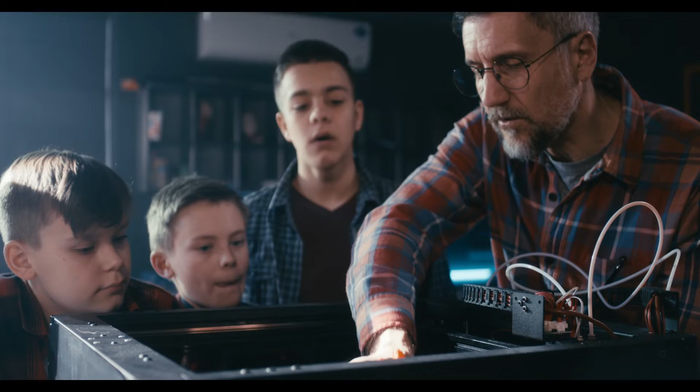Today we're having a list of the world's best 5 3D printers for your office, lab, studio, or workshop.

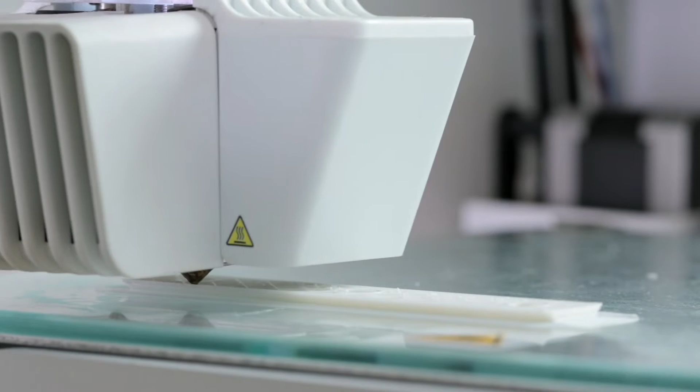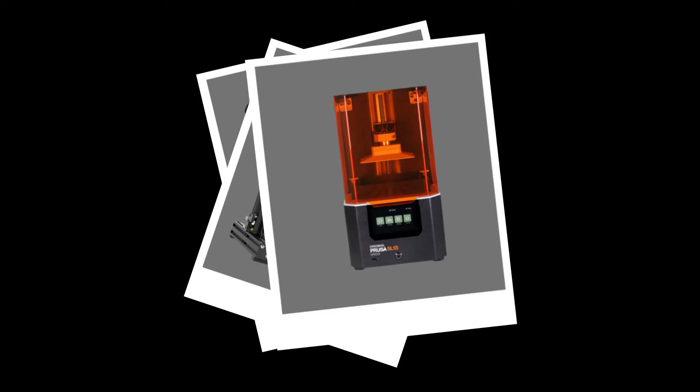3D printing is a valuable thing to have access to, and for your small businesses this process is an essential part of project needs on a daily basis. If you're thinking of buying a 3D printer for your small business, we've selected 5 top 3D printers that are easy to use yet produce high-quality, reliable results. Some of the items below are given with links in the description of this video.

Let's start the top 5th 3D printer.

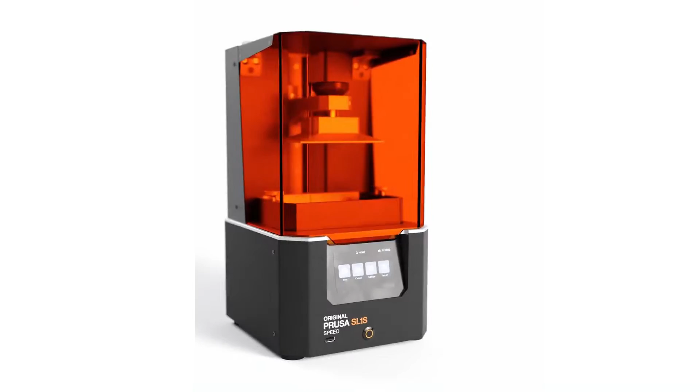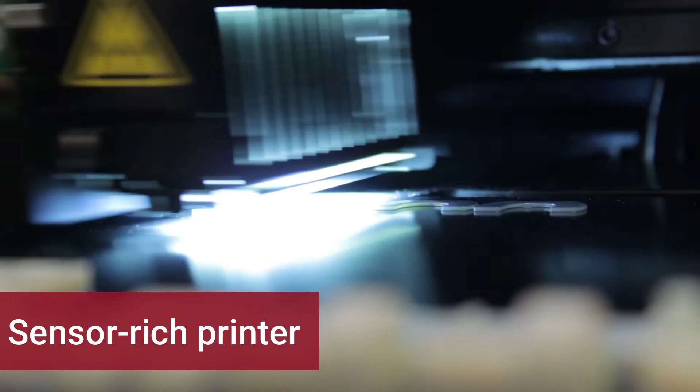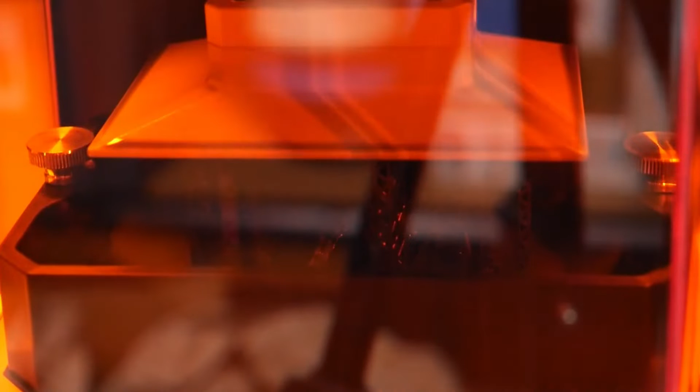5. Prusa SL1S. The Prusa SL1S is an MSLA resin 3D printer that offers speed, precision, and a high level of automation. The sensor-rich SL1S offers a guided unboxing, setup, and calibration through the color touchscreen LCD, and the included manual contains detailed documentation, which provides troubleshooting steps for nearly every common problem you may run into. Prusa has developed the hardware, software, and even the resin used by this machine to work together.

And this effort has culminated in one of the easiest to use resin MSLA 3D printers on the market. The SL1S uses a tilting resin vat that enables blazing fast print speeds without compromising print quality or risking part failures. The vat peels gently from each cured layer, allowing for wide cross-sections or thick, solid models to print without excess suction causing the part to stick to the FEP film.

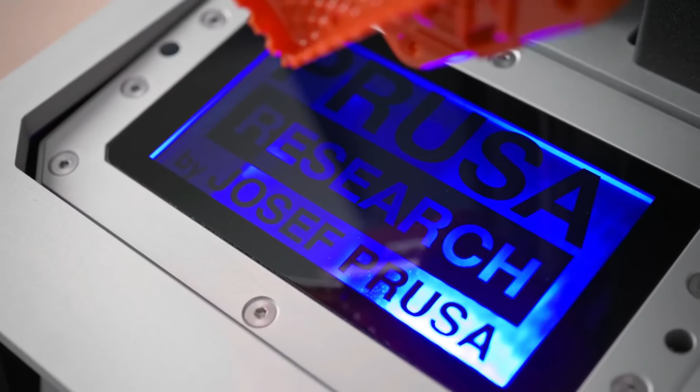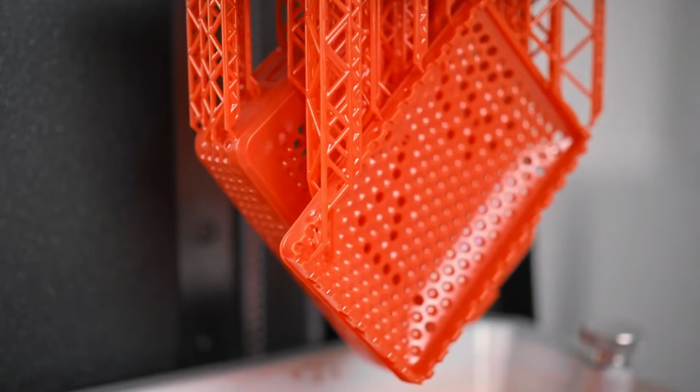The 2560 x 1620 masking LCD resolution and 5.96-inch LCD size give an XY resolution of 49 microns, which is standard for most 2K resin MSLA 3D printers. The rigid aluminum gantry and solid metal build platform move via a ball screw linear actuator, offering precise layers down to 0.025 mm, 25 microns.

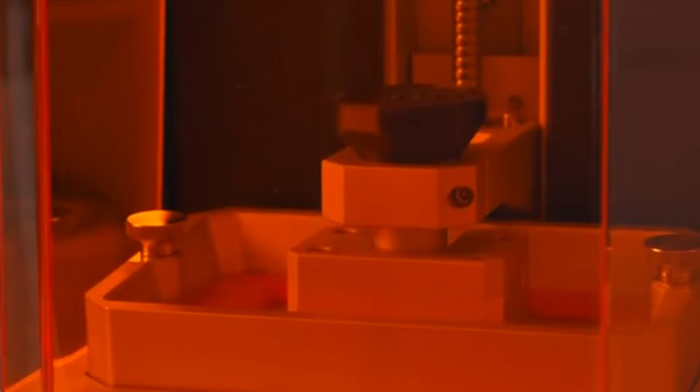Selling at a very affordable price range compared to other brand 3D printers available in the market, the SL1S is targeted towards prosumers or businesses looking to offer high-resolution models with a fast turnaround time.

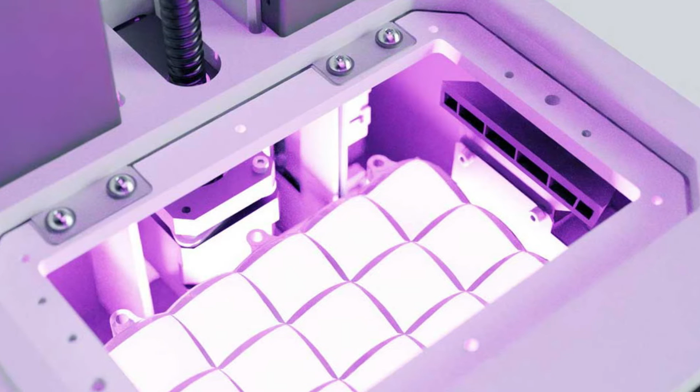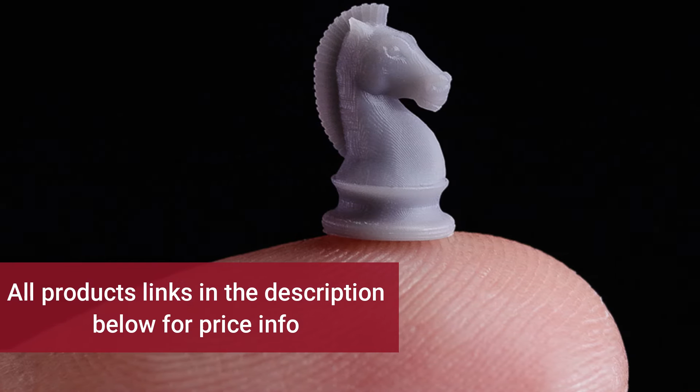For hobbyists interested in high-resolution printing at a lower cost, the Elegoo Mars 2 Pro and Elegoo Mars 3 both sell for a low price and offer similar XY resolution at the expense of a slower print speed.

Our next useful 4th 3D printer.

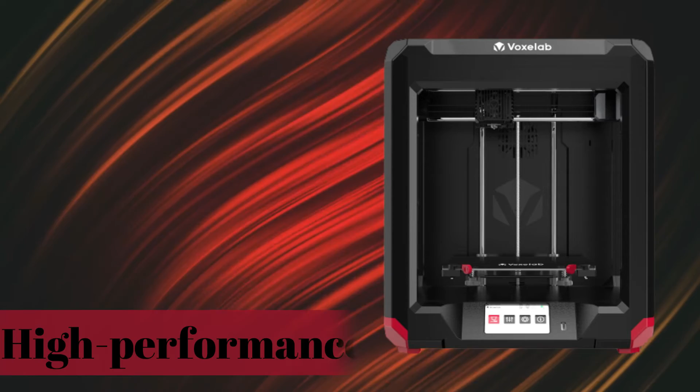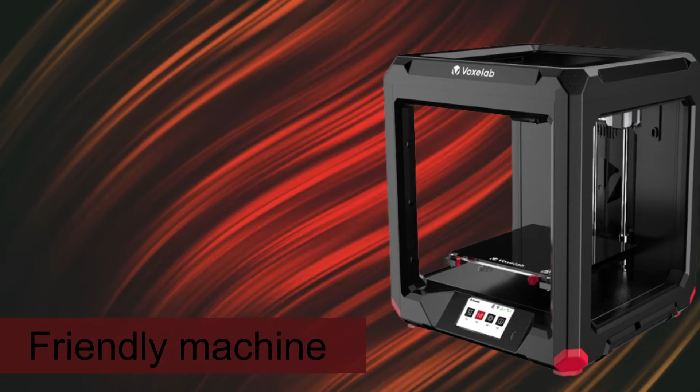4. Voxelab Aries printer. It can be hard to find a single 3D printer that does everything well, but the Voxelab Aries is an impressive machine that offers high-performance printing at a budget price without compromising on build quality. The Aries is designed to be a beginner-friendly machine, and this semi-automated 3-point bed leveling process means you can be up and printing in less than an hour after opening the box.

The Aries features a Core XY motion system, which means the build platform remains stationary during printing and only moves down in the Z direction during layer changes. This means the printed part is not moved back and forth during printing, which makes it easier to print tall, thin parts without worrying about them toppling over.

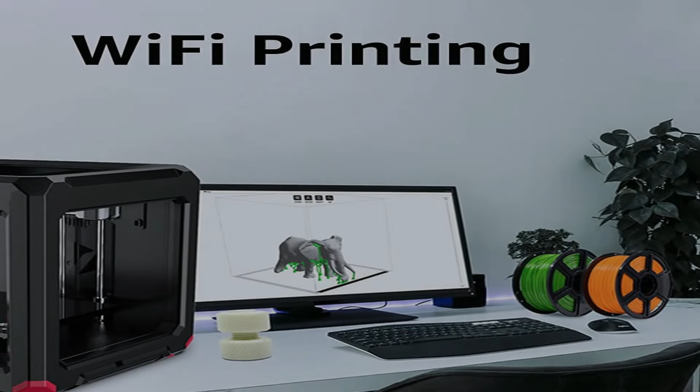In addition, features like the built-in Wi-Fi allow the Aries to be started remotely, which is ideal for anyone who doesn't like moving files back and forth via micro SD card or USB flash drive.

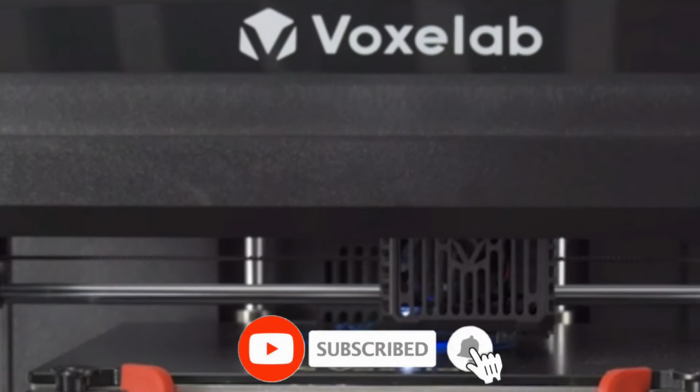Selling at a very affordable price range than other brand 3D printers available in the market, the Voxelab Aries is a 3D printer that punches way above its weight class and offers a lot to anyone interested in a plug-and-play 3D printer.

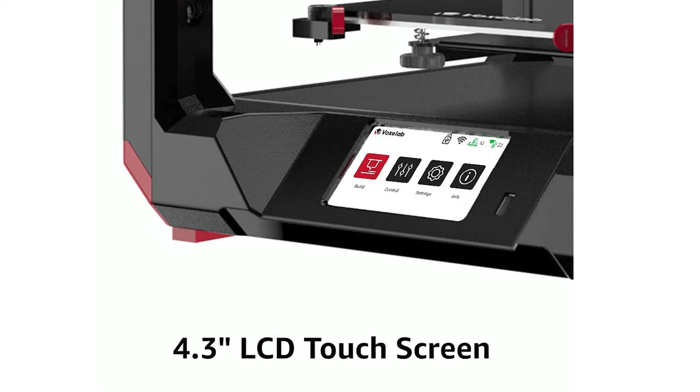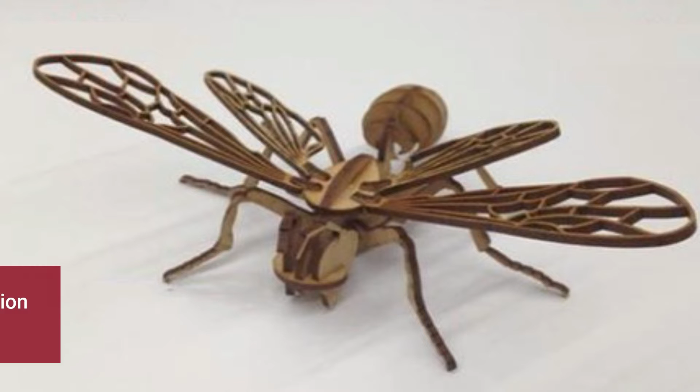The simple, guided setup and easy-to-read LCD screen on the Voxelab makes it ideal for classroom and library use, and the durable plastic enclosure is perfect for young learners. For anyone interested in a more hands-on experience who wants to build the printer themselves, the Creality Ender 3 Pro is slightly less expensive and offers a more modular system.

Then the next 3D printer: 3. Anycubic Mega S 3D printer.

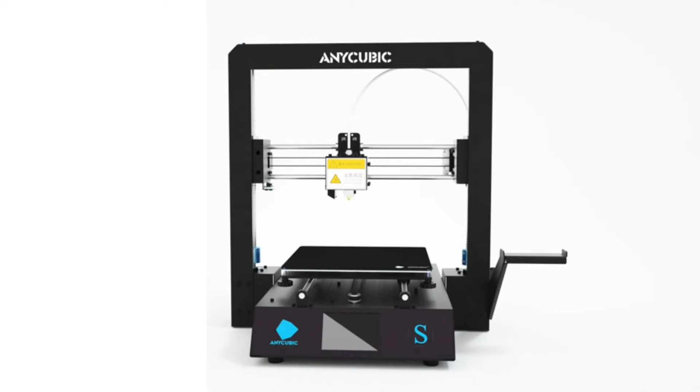This is a great durable machine that offers lots of nice features at a good price point. The Anycubic Mega S 3D printer, with 8 screws and 3 cables for assembly in minutes, not only meets fast assembly needs for expert users but is also friendly for beginners.

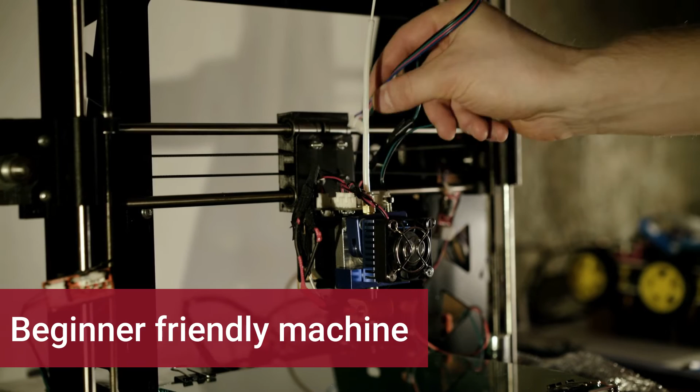The extruder and filament drive have been made to reduce the risk of clogging and support many filament types. The rigid metal frame can minimize shaking to improve print quality. You will get a resume job function that ensures you do not lose your job if there is a power interruption.

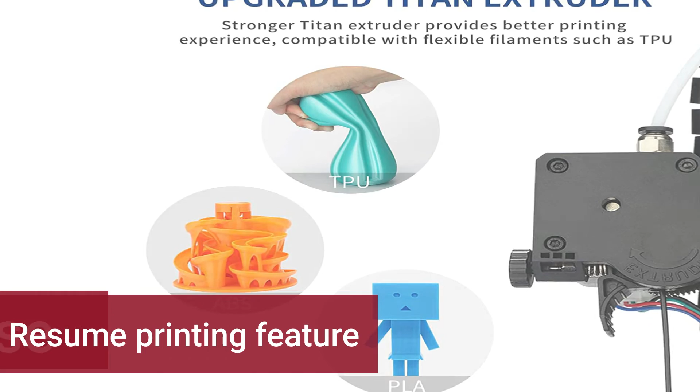The Ultra Base is made for superior function, and you will love that the material offers superior adhesion when printing and then easy separation when the job is complete.

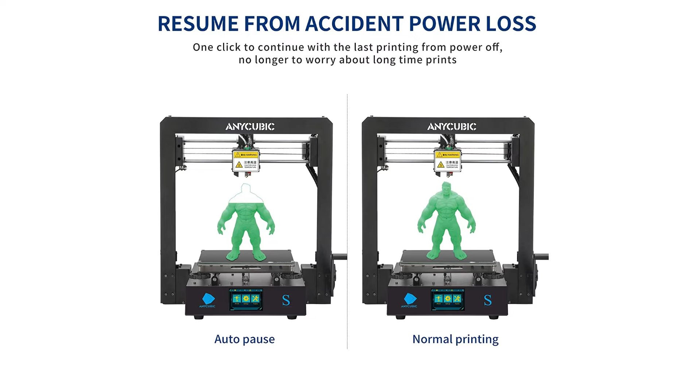Mega S 3D printer can resume printing after power outage or any other unexpected stoppage. Its printing volume reaches 8.27 x 8.27 x 8.07 inches.

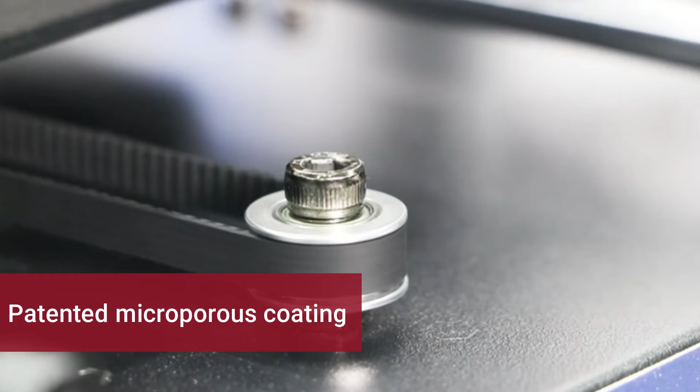The printing platform surface is coated with a patented microporous coating, with excellent adhesion when printing, and then effortlessly falls off the bed when it cools to room temperature at the end of the print.

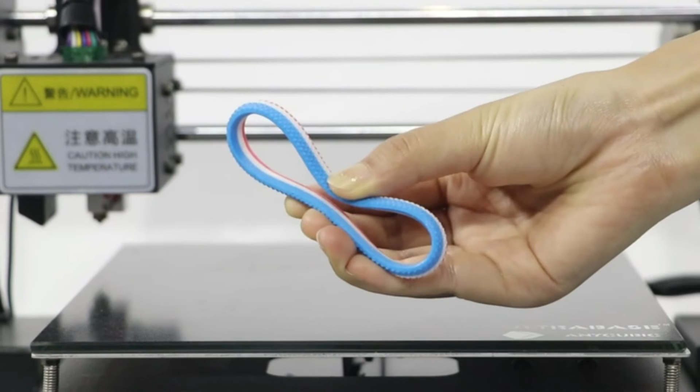You get lifetime customer support and 24-hour helpline assistance with this machine, so that you are never left with a job half finished with a deadline in front of you. This is a really great machine that is really durable.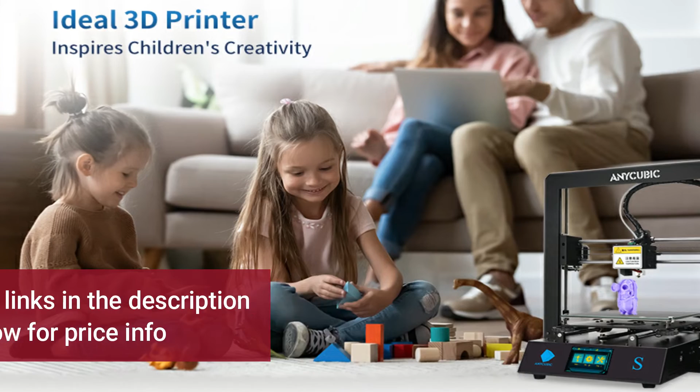Now we talk about the second 3D printer: the Monoprice Cadet. The Monoprice Cadet is a 3D printer designed from the ground up, with safety in mind, and is ideal for the beginner who is interested in getting started.

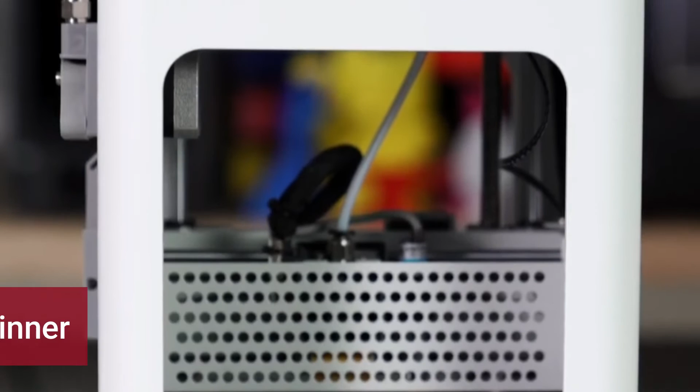The motion components are hidden internally in the frame, and the heated nozzle is protected by a large metal grill, keeping curious fingers away from the parts of the printer that shouldn't be touched during operation.

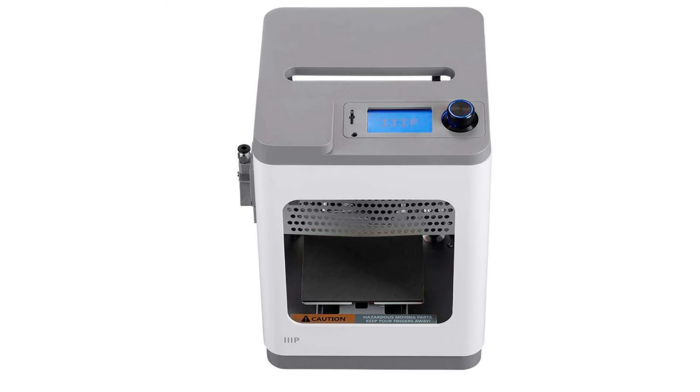The printer includes a bed leveling probe, which allows for touch-free automatic bed leveling, something a beginner will greatly benefit from, as you would expect for a printer in this price range.

The build volume is modest, with a roughly 4-inch cube being the largest possible print. The build platform feels like an oversized fridge magnet, and parts detach quickly and easily without requiring hand tools.

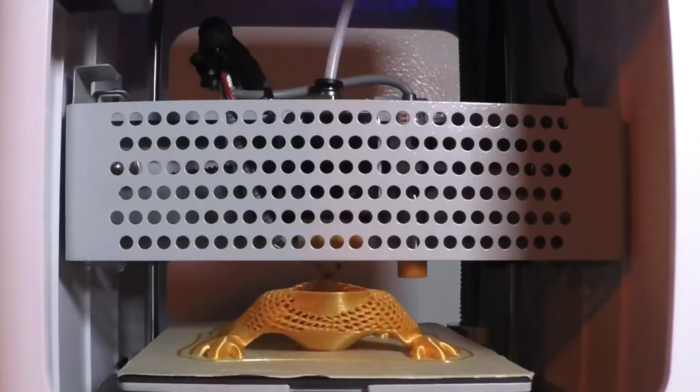The Cadet does have a few quirks to consider before you pull the trigger. For one, the side-mounted filament spool holder is mounted low on the printer, so most standard 1 kilogram filament spools won't fit. You can mount 500g or smaller half spools, or 3D print a filament stand to hold full spools.

The Wi-Fi feature of the printer is also a little hit or miss. We were not able to get it to connect, and several other users have noted the same issue online.

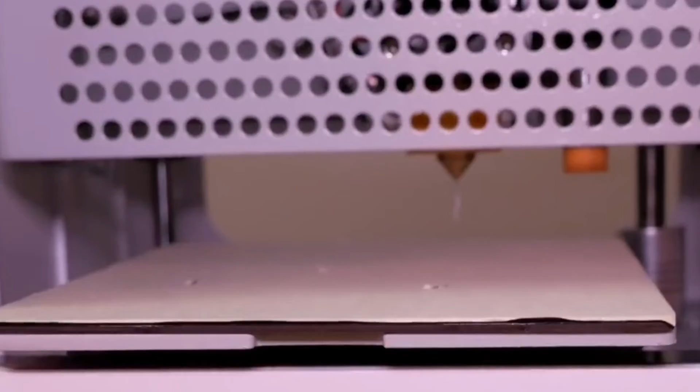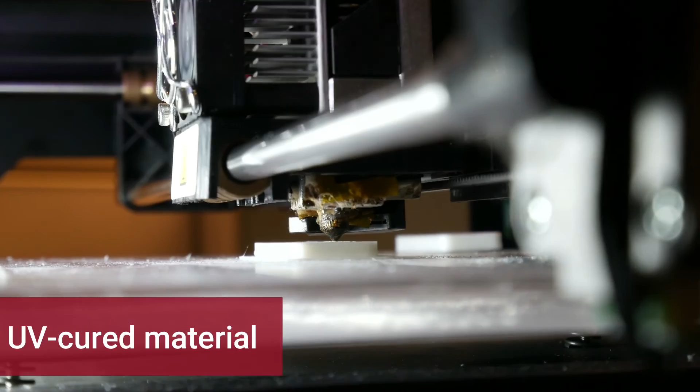Resin 3D printers use a UV-cured material to form a model layer by layer as it rises from a vat of liquid. This style of 3D printing can create very finely detailed models, but it requires more cleanup and post-processing than you might expect.

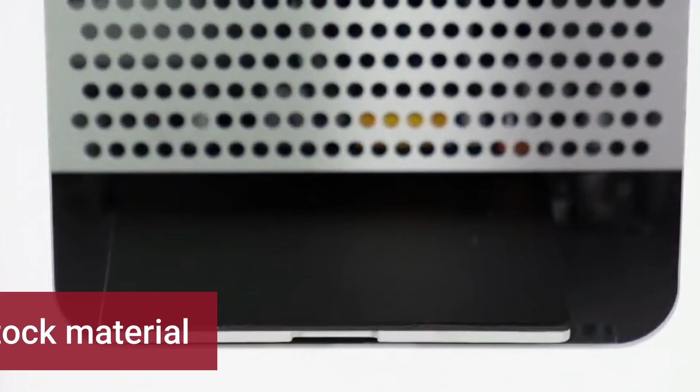Filament 3D printers use a feedstock material, which is fed into a hot nozzle and extruded out layer by layer to form a solid model. This style of printing requires little to no post-processing, but results in a generally coarser appearance.

The last one, 3D printer number 1: Creality Ender 3 V2. The Creality Ender 3 V2 is an extraordinary 3D printer for beginners, made with a full 4.3-inch color LCD screen, a budget-friendly 3D printer.

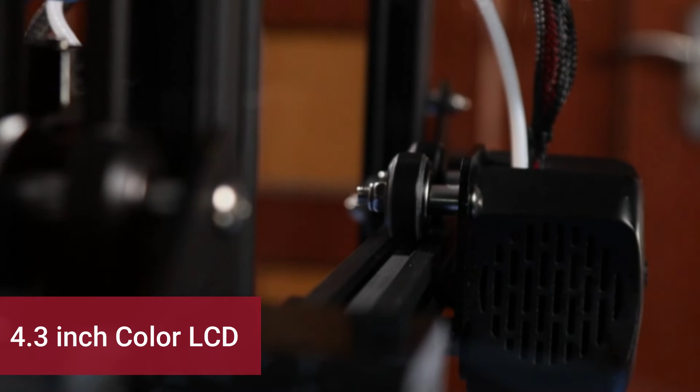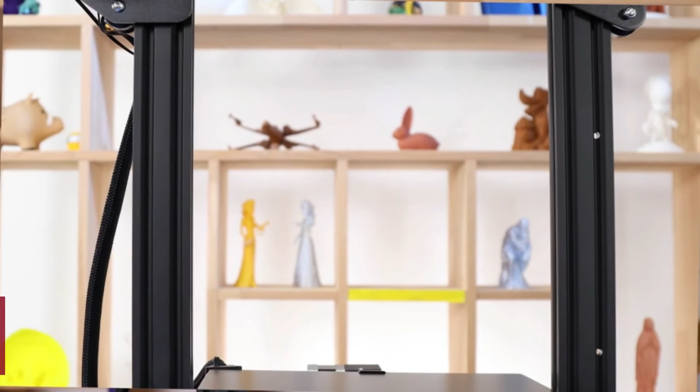The frame is still high quality. It has been improved over the previous versions, but it's still very comparable to the one from the Ender 3 Pro. The 3D printer can automatically continue printing after power off or filament breakage, so you can stress less over print disappointments.

It additionally has a self-created 32-bit quiet motherboard to guarantee smooth movement and no noise during printing. All the parts fit together flush and tightly, and I had no issues mounting it. There weren't any skewed parts, so we are really happy with the sturdiness and the quality of that frame.

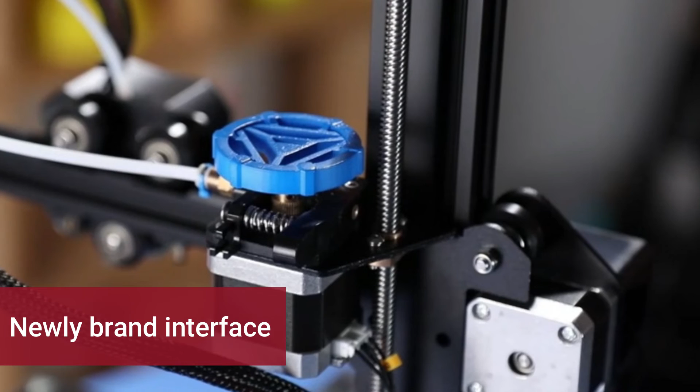The Creality Ender 3 V2 additionally features a newly branded interface. Otherwise, the flex material is going to escape that inlet pretty easily, so that's an upgrade to apply if you want to go for TPU printing.

The new interface significantly updates the client experience through the recently designed UI framework, built for simplicity and basic operation. One more element of the Creality Ender 3 V2 is its tempered glass print bed.

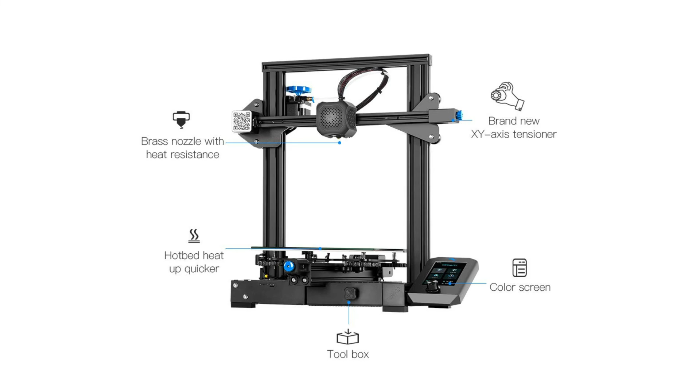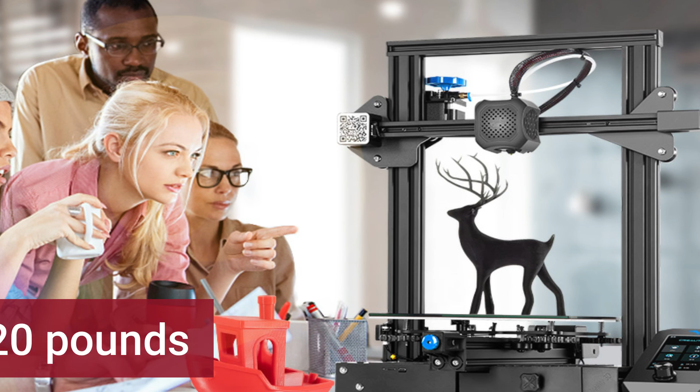Its printing size is generally 220 x 220 x 250, according to its specification. Its brand name is Comgrow, with compatible devices like PC. Its compatible material is polylactic acid with included components. The 3D printer weighs 17.20 pounds, and the model number is Usoon Ender 3 V2 FBA.